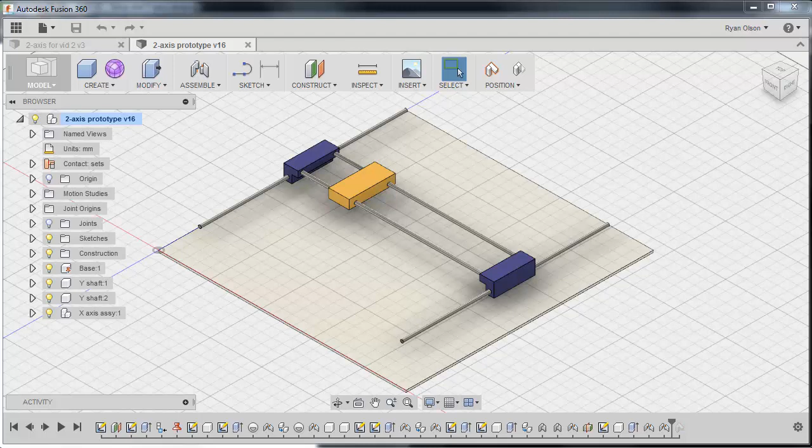I'm a product design engineer who's been using SolidWorks for about 9 or 10 years now, and recently I've been experimenting with a relatively new software package put out by Autodesk called Fusion 360. I think this package has a lot of potential, but it does require you to think a little bit differently.

From the way we're used to thinking in SolidWorks, Pro-E, Inventor, packages like that. So with that in mind, I decided to put together this video series that shows the process of working through some modeling exercises in Fusion 360, specifically with a concentration on the way that some of the workflow and thinking changes for those of us coming over from a package like SolidWorks.

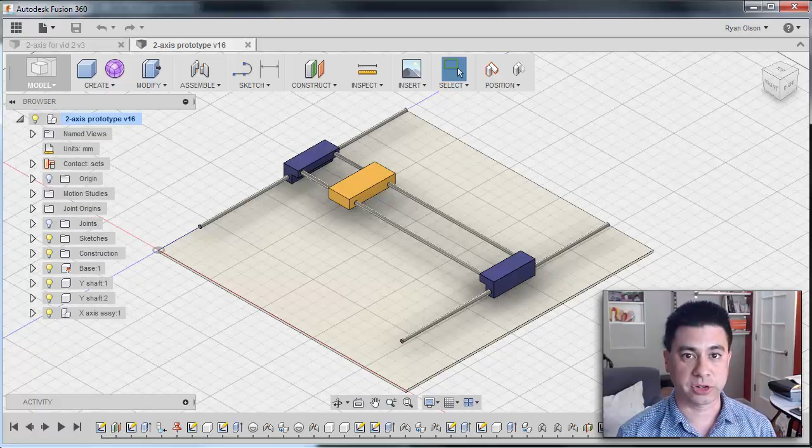For this modeling exercise, I thought it might be useful to look at something like a very simple two-axis CNC machine. This is something that might be the basis for a laser cutter or something like that. Certainly nothing revolutionary in terms of the design. It's very simple, but it gives us a lot of opportunities to look at different things in Fusion 360 related to the way that you would put together an assembly, the idea of mates or joints, and the whole idea of modeling in place, which is a big deal in Fusion 360.

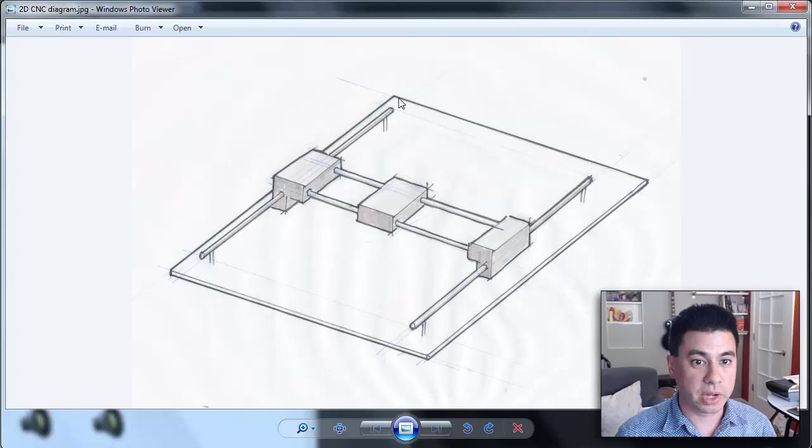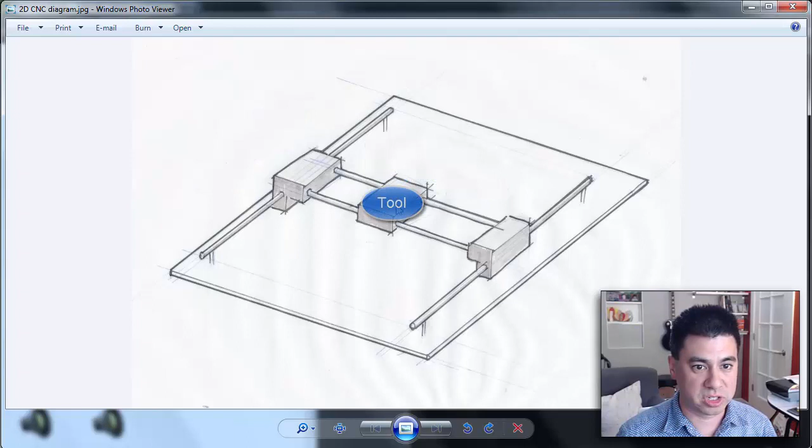So basically what we've got here is a tool bed, a couple of shafts which define the y-axis, and along those shafts runs this subassembly that's the x-axis carriage assembly. So it'll slide in the y direction. The sled on the x-axis assembly can slide in the x direction, and that allows the tool, whether it's a laser or mill bit or whatever, that's on this sled to move anywhere in 2D around the tool bed.

We'll begin by defining a guide sketch, which will define the location of key components in our main assembly.

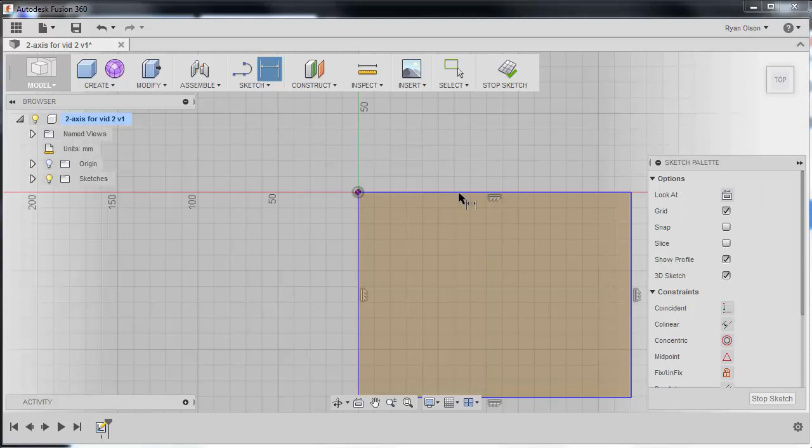We'll begin with a tool bed size of approximately 600 by 600 millimeters. We'll also define two lines which will show us where the y-axis shafts lie with respect to the tool bed.

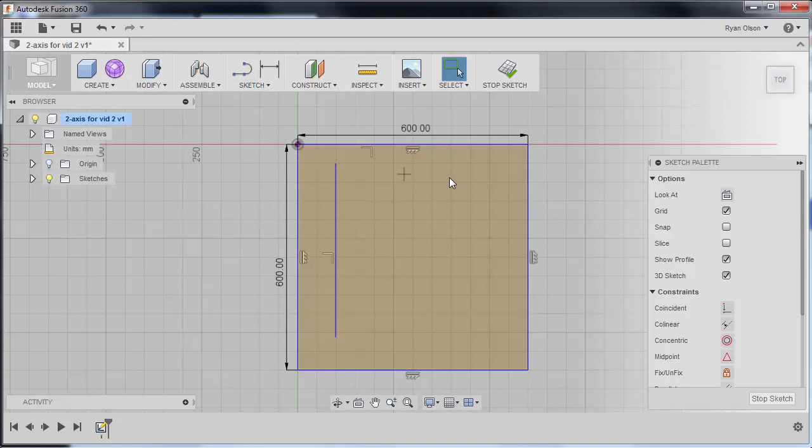We'll set these two shafts to be the same length. In this case, we'll be making these shafts from stock material we already have on hand, so it's our design intent for these shafts to be of a specific arbitrary length.

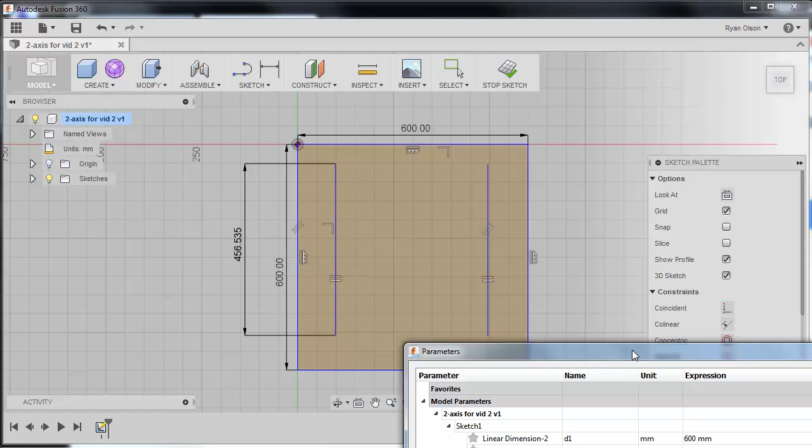We'll codify that design intent by setting up user parameters which define the length of these shafts. We'll define a new user parameter that represents the length of the y-axis shaft, and then assign the dimension from the sketch to use that parameter as its value.

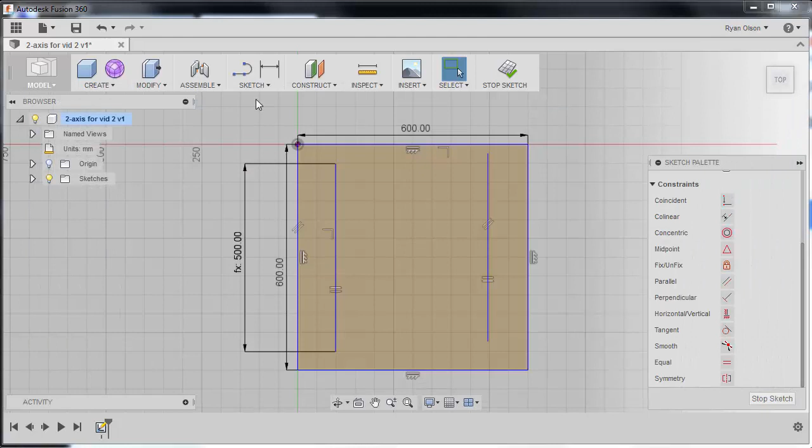At this point, we want to set up the positions of these y-axis shafts so that they are centered between the front and back of the bed. So we'll set up some guidelines to do that.

There are several ways to position these guidelines such that the y-axis shafts are centered between the front and back of the bed, but in this case, let's do it using a formula.

We also need to define the amount that each y-axis shaft is inset from the edge of the bed. Normally I would do this with reference planes in SolidWorks, but in Fusion 360 it's easier to do this in a guide sketch, as you'll see later.

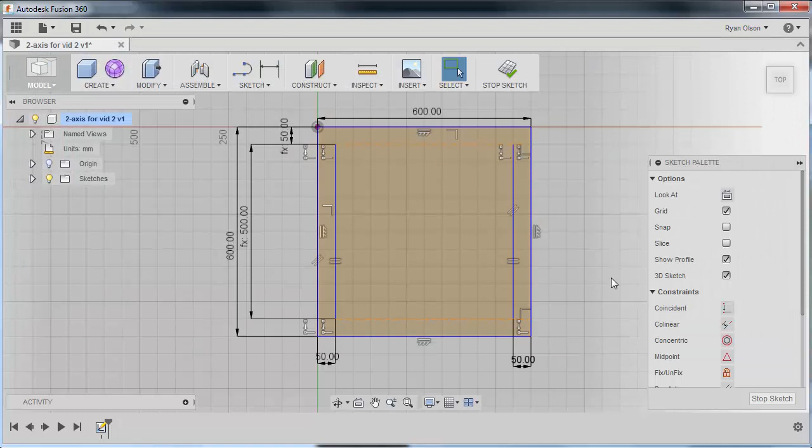That's enough for this guide sketch for now. Let's go ahead and rename this guide sketch so that we can find it easily.

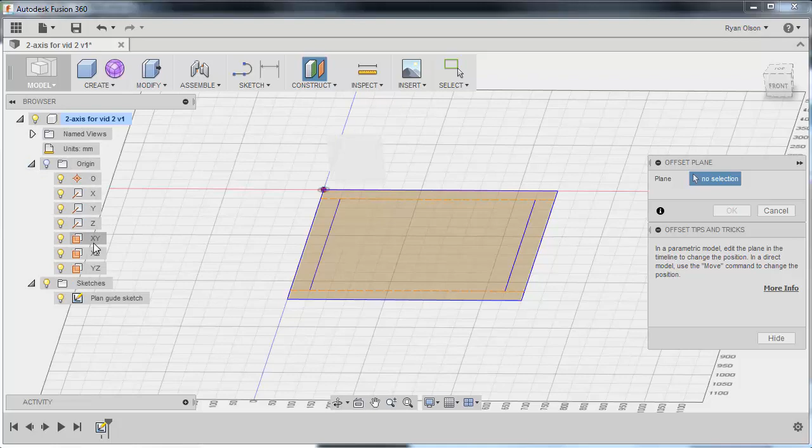The next step is to define a plane which will tell us how high above the bed the y-axis assembly resides. We can do this with an offset plane.

Since this plane offset dimension is something that we're likely going to be changing during the development of the model, it can be useful to label that dimension.

Now that we have a plane defined for where we want to put the y-axes, we can project our two y-axis position lines onto that plane so that the lines will be in the right place in 3 dimensions.

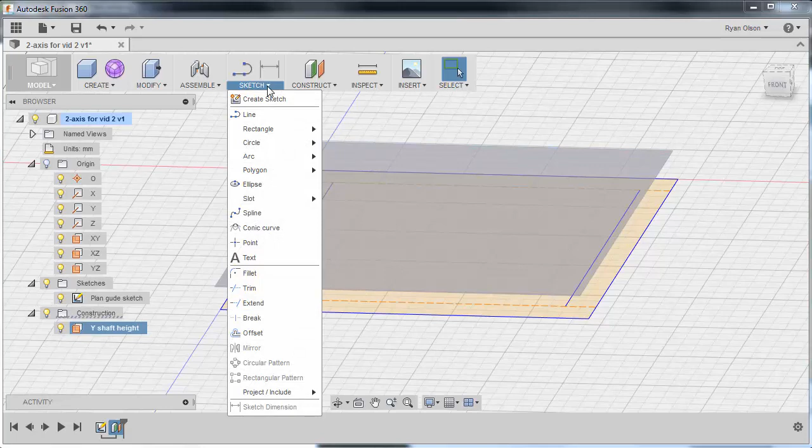We'll use the project tool in the sketch interface, which works a lot like convert entities in SolidWorks. These 2 lines on this new sketch now represent where we want the Y shaft components to be in 3D.

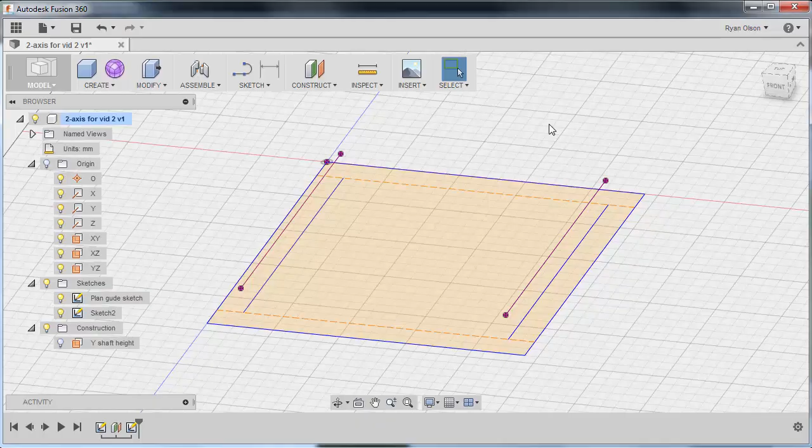At this point we should start adding some components to the assembly, so let's start with the tool bed itself. There are a few different ways to create components in Fusion 360, so I'll start with the most basic, which is creating a body and then converting it to a component.

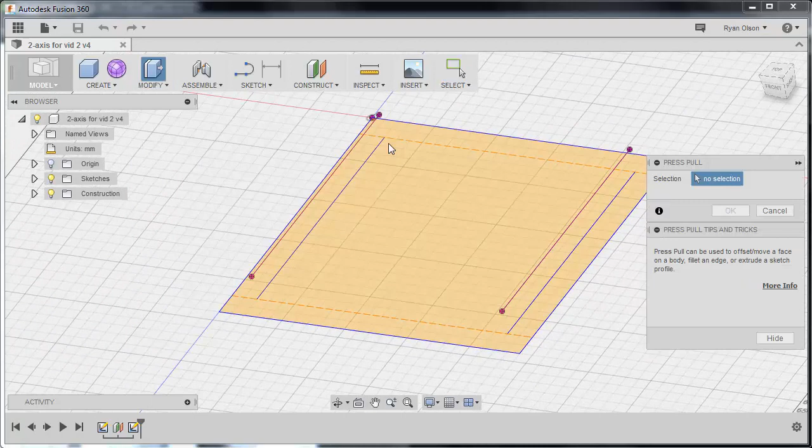We've now created a body at the top level of the assembly, but it's not yet its own component. By creating the component from the body, it is now absorbed into a new component, and the component is positioned where we want it.

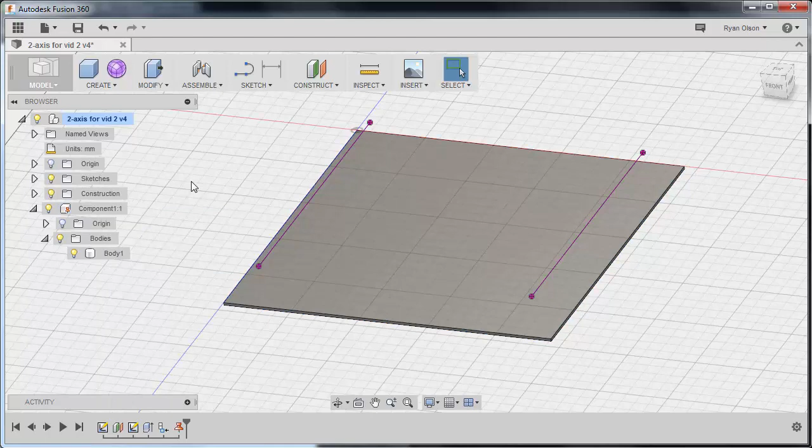In this case, we don't want the tool bed component to move relative to the origin of the assembly, so we're going to ground it, which is like fixing a component in SOLIDWORKS. We'll go ahead and give this component an appropriate name and then hide it so that we can add the 2 y-axis shafts.

We can now look at a couple different ways of adding the Y-shaft components. SOLIDWORKS users such as myself might be inclined to do it by creating a new component and then positioning that component within the assembly in the place that we want. And indeed, that is possible in Fusion 360, as I'll show here.

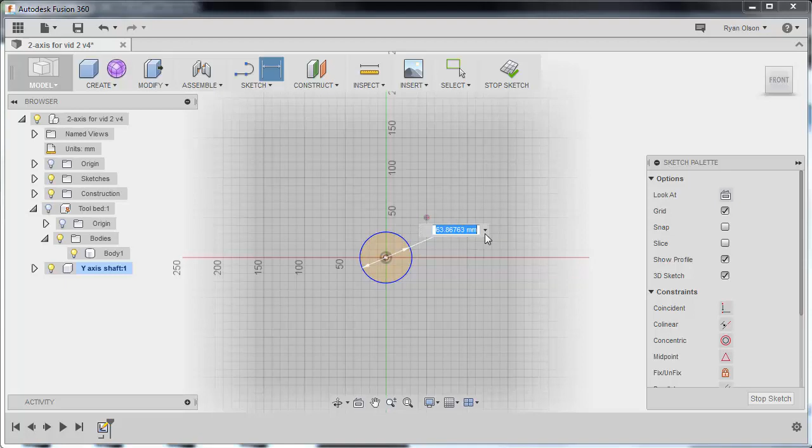We'll create a new component. We'll activate the component to make sure that we're working within this component. While we're dimensioning the shaft diameter, we should probably set up another user parameter, since this is something that could also change through the evolution of the design.

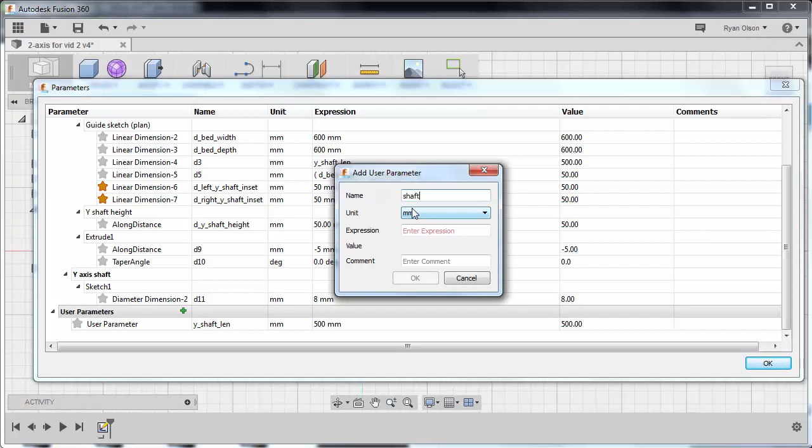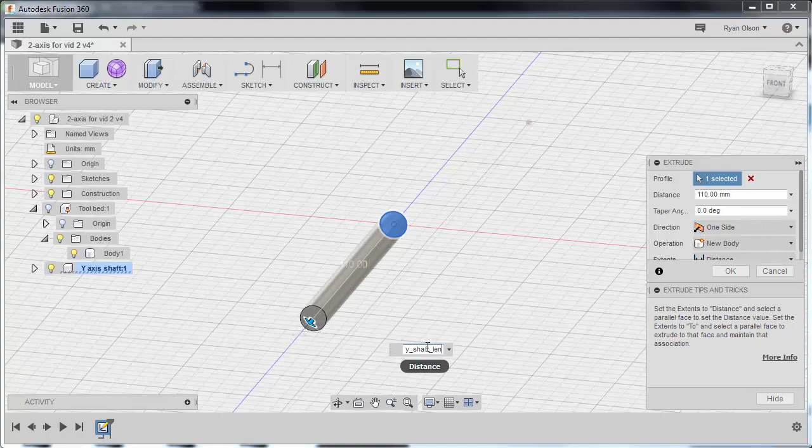Now that we have our profile sketch, we can extrude it to create a shaft of the desired length. We now have a component with its origin at the assembly origin that contains one body, which is a shaft of the proper dimensions. However, it's not yet positioned correctly in the context of the assembly.

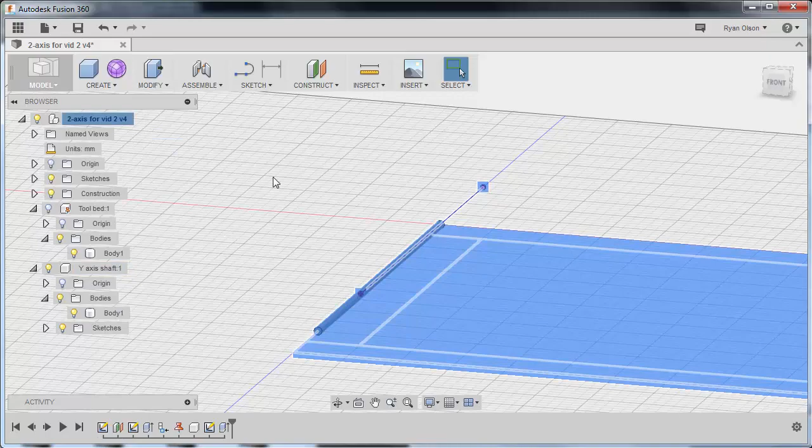Since the component isn't mated or jointed to anything, we can move it freely within the assembly at this point. However, notice that once we do move it, we have the option to revert it to the original position or create a snapshot feature which will record the new position of the component. This will become very important later on.

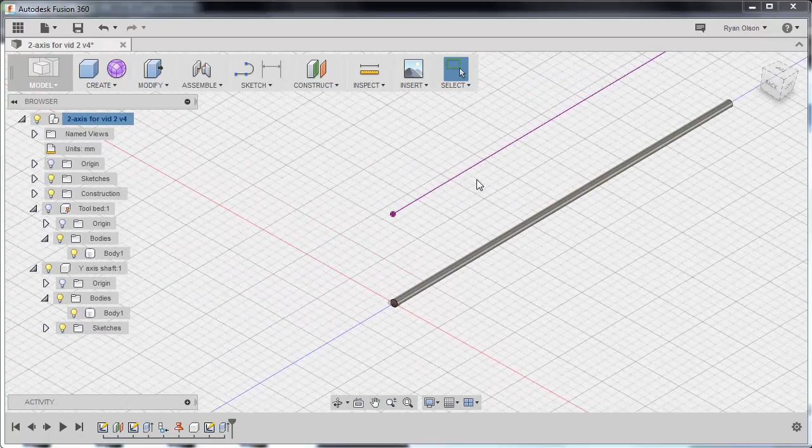What we want to do here is to mate this component with the y-axis guideline that we created before. This can be done using a rigid joint. As you can see, we've got the location right, but the orientation of the joint is wrong. This is because the joint origins of this rigid joint aren't properly aligned. We can fix this easily by adding our own joint origin.

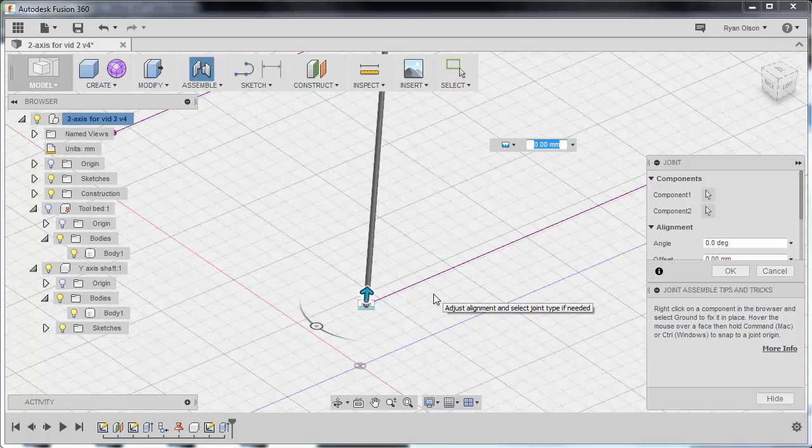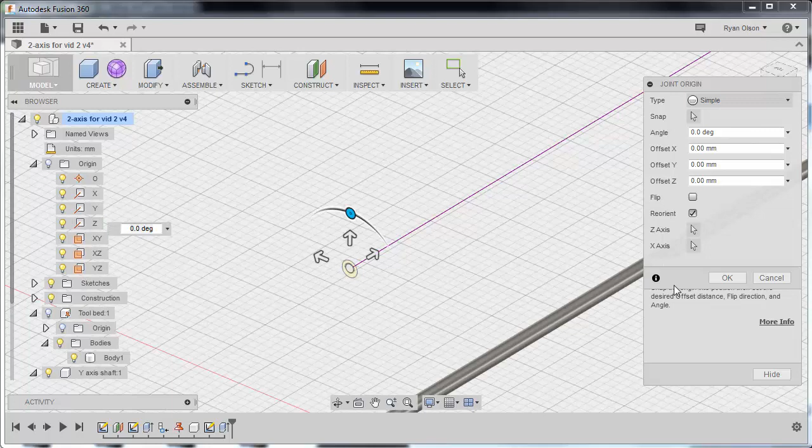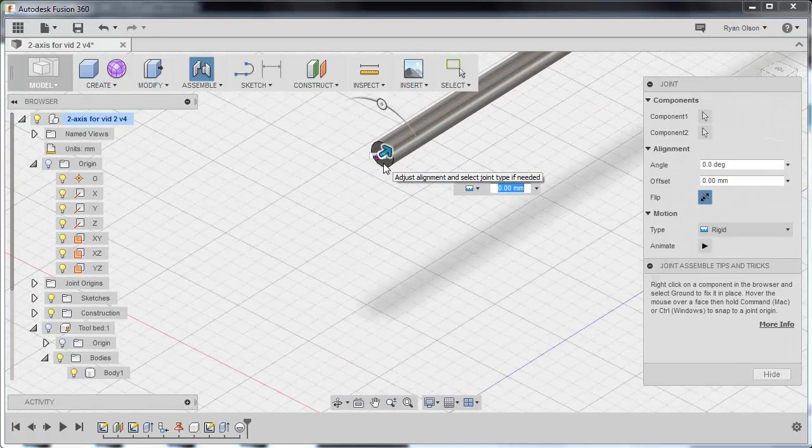The joint origin is now located where we want it to be, but we need to reorient it. Now that we have a custom joint origin in our assembly, it's an easy matter of mating the shaft component with that joint origin, which belongs to the parent assembly. This component is now rigidly jointed to the assembly and will follow these guidelines if we were to change them.

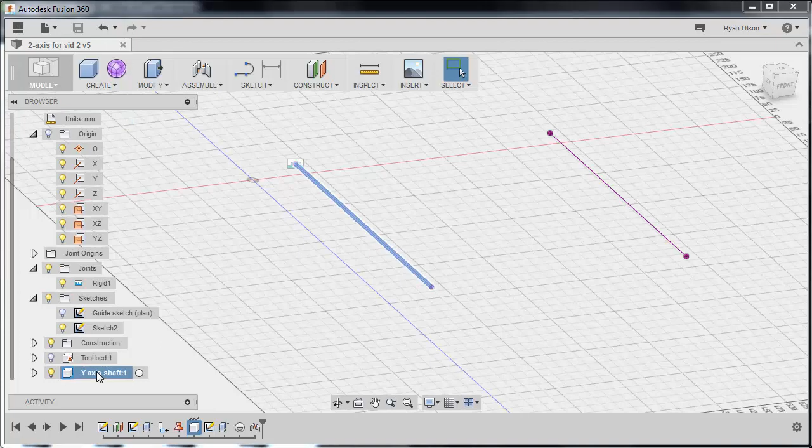We now want to place another instance of that component at the right-hand side Y-shaft location, which is simply a matter of doing a copy and paste. Control C, Control V. Now notice that I've moved it to approximately where I want it to be, but it's not yet jointed to this guide sketch. So if I were to change the sketch, the component wouldn't move with it. We need to set up the proper joint.

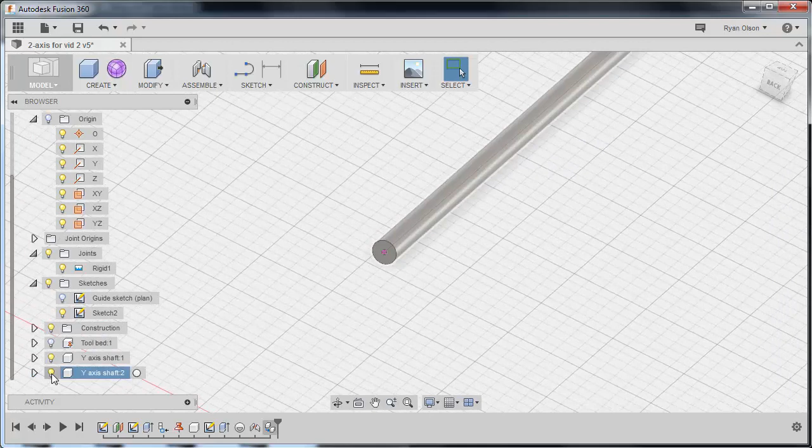To do that, I need to set up a joint origin on this guideline as well. And now we can establish the joint. Note that I've moved it out of the way temporarily just so that it's easier for me to click on this, but I'll get a warning about the fact that I've changed the component's position as I do the joint.